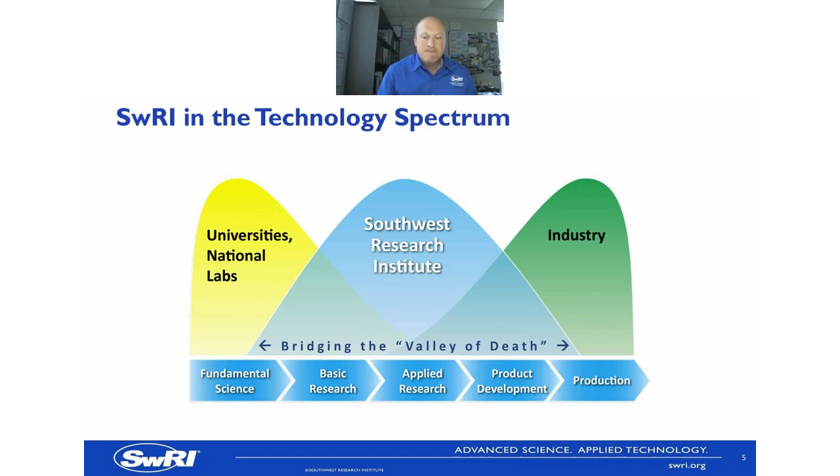The very first IR&D we undertook was over a decade ago, and it was the development of a new coating process based upon physical vapor deposition. PVD describes a variety of physical deposition methods that can be used to produce thin films on substrates, including glass, ceramics, metals, and polymers.

Material transitions from a condensed phase, whether liquid or solid, to a vapor phase, where it's transported to the surface of what you're trying to coat, where it then turns back into a solid condensed phase as a thin film. The most common process for conversion to the vapor phase is sputtering or evaporation.

Magnetron sputtering utilizes a magnetic field and an electric field to confine particles near the surface of the target. That increases the ion density and results in a high rate of sputtering. Magnetron sputtering is an exceptionally versatile method for thin film deposition. Other deposition methods are limited to the materials they can use as the sputtering target.

The source material can be almost anything with magnetron sputtering, since it doesn't need to melt or evaporate the material. The sputtering deposited film will have a composition that closely matches the source, and it will adhere to the substrate better than evaporated films.

Some of the major advantages of the process are a high deposition rate, thorough coverage of materials, high purity of the films, highly adhesive films, and uniformity on large areas. With regard to piston rings in particular, the low temperature is very beneficial.

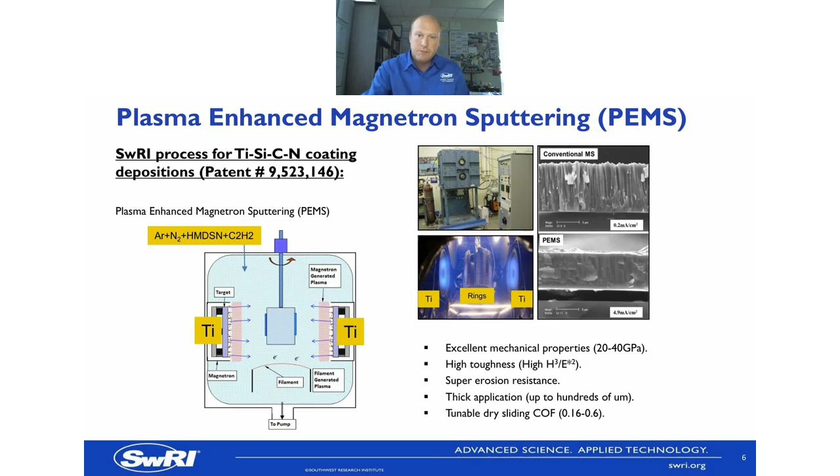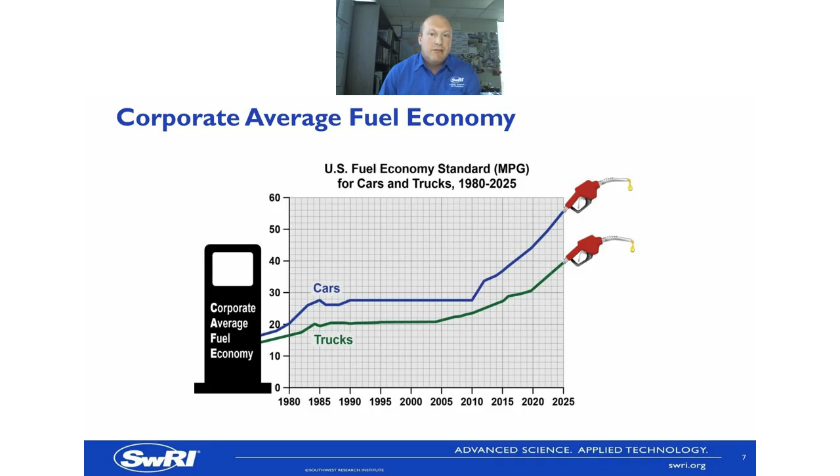The second IR&D was undertaken in 2013, in response to the increased need to reduce friction in vehicles to improve fuel economy in order to meet corporate average fuel economy targets. You can see on the graph they were becoming very strict at that time and were projected to become even more strict in the future. It reached a point where almost all the low-hanging fruit had been got from the car manufacturers, and we needed something that was going to really make a difference. So we targeted piston rings.

By targeting the piston rings - sorry, I apologize, we didn't do a thick coat of CrN. What we're looking at here are the limitations in 2013. Some of this has developed since then, but at the time there were limitations for traditional piston ring coatings. They used CrN coatings of up to about 50 microns in diesel engines. That's okay in diesel engines, but in gasoline it's not so good, it has a high dry coefficient of friction, which is obviously not great for fuel economy.

DLC coatings weren't really commercially accepted in about 2013, and there was insufficient coating thickness at that time. The titanium, silicon, carbon, nitrogen nanocomposite coatings that we developed had some advantages - they were super hard, thick coatings, erosion and wear protective - but they did still have a high coefficient of friction.

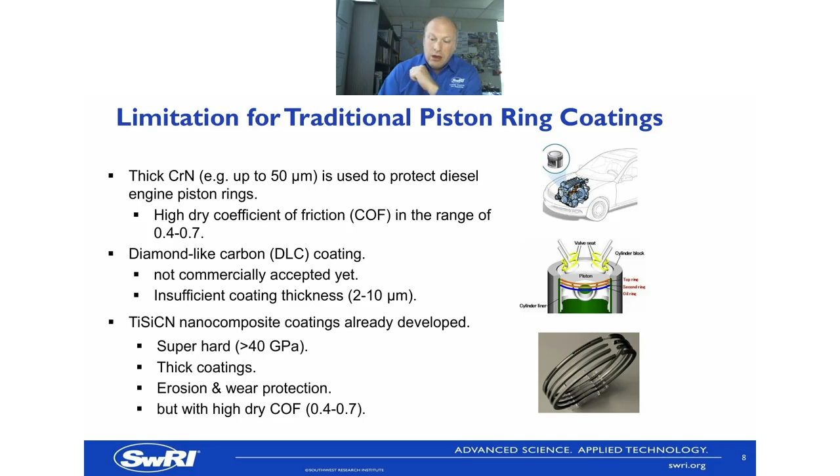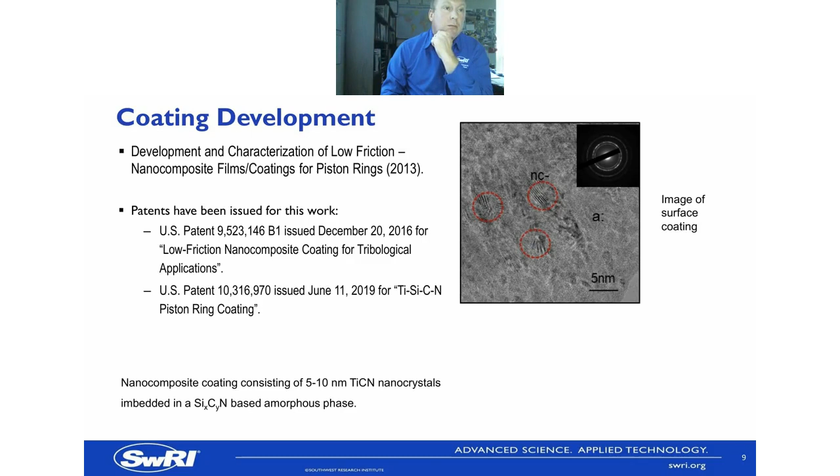So what we did is we developed the coatings further, and started to look at how we could improve that. It is a nanocomposite coating that consists of nanocrystals embedded in a silicon carbon nitride based amorphous phase. We patented that, and we also patented the particular ring coating that we were looking at doing.

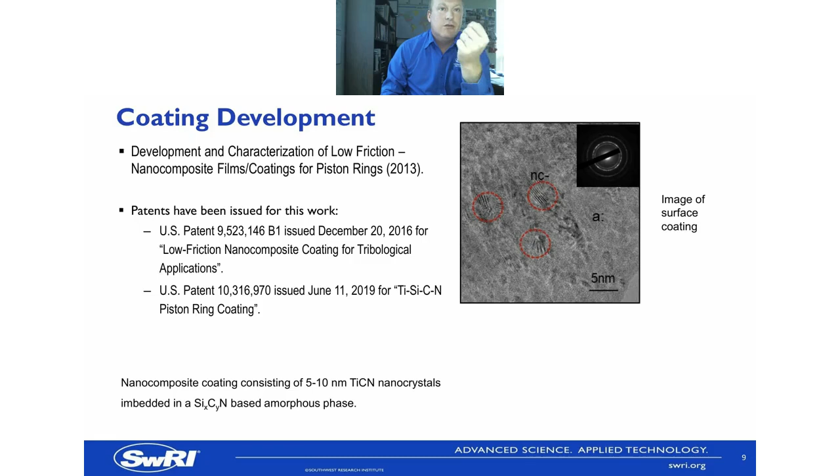The way to think about this - if you look at that image of the surface coating, think about that as cookies, basically. Chocolate chip cookies are a perfect example of how those coatings look.

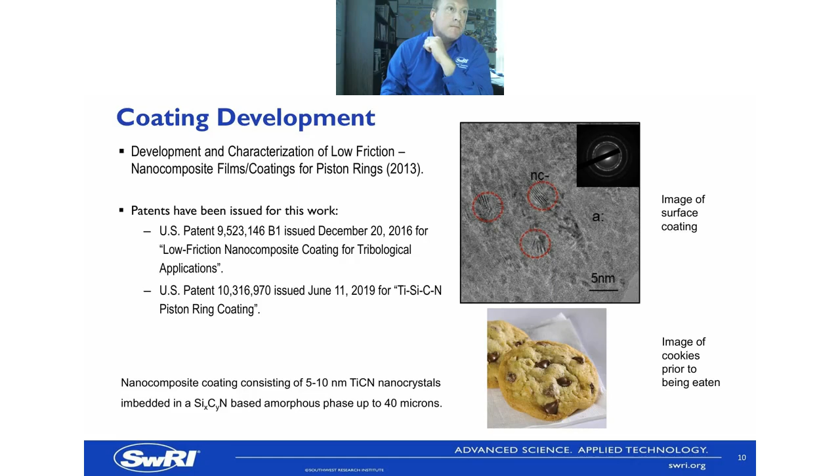We took this and tried probably about 12 different types of coatings. This method is kind of tunable depending on the amount of gases you put in and how you use it. And we tried, like I say, about 12 different coatings.

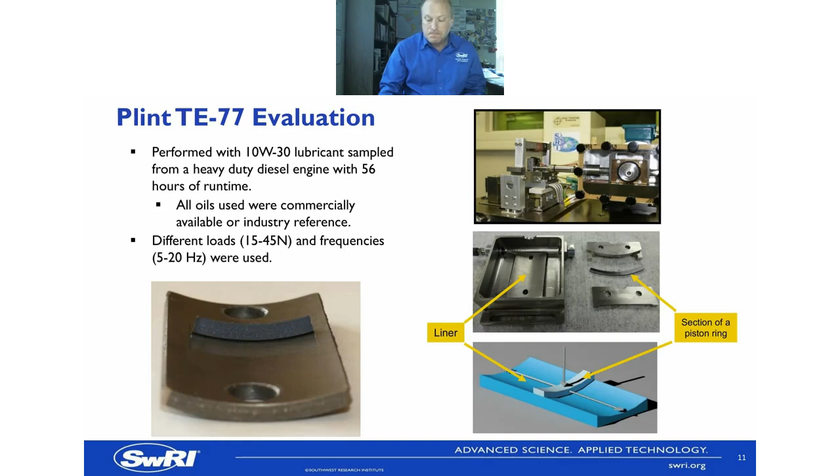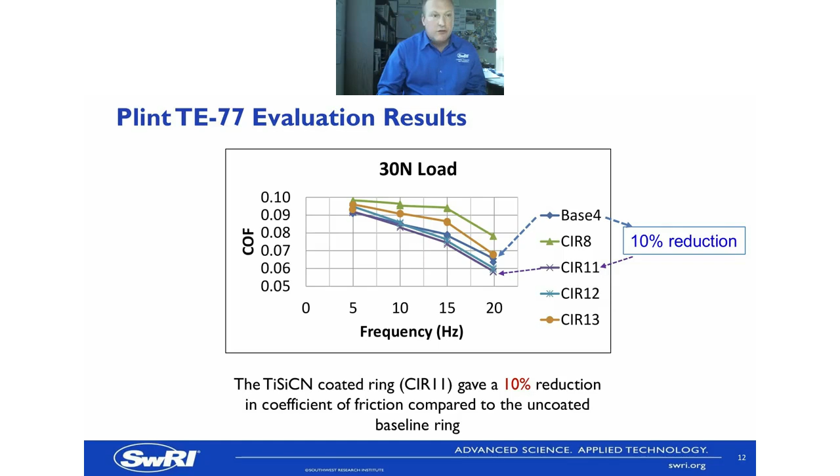We had our original coating, which we're calling base 4 on this graph. I haven't put all 12 on there because you can't differentiate between the lines if I do that, but I've put some example ones on. Some of them you can see increased in friction and some decreased. The CIR11 coating that we developed actually gave us a 10% reduction in friction at that 20 hertz position.

So that's the one we then took and worked further with. But to check that it was really giving us that answer, we coated some piston rings for our Ricardo Hydra engine, put them in there, and ran them in that engine. You can't really see the engine in that left diagram because it's surrounded by all the ancillaries.

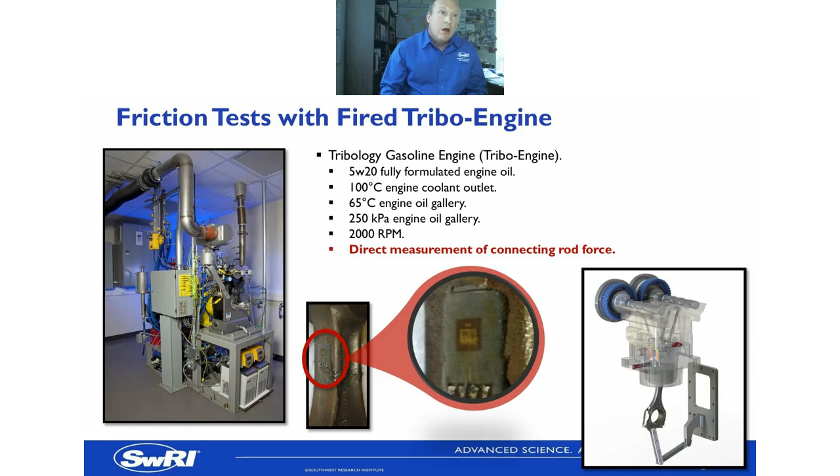But basically, if you look in the middle there, we have sensors on the side which allow us to measure the friction response. They're in the Wheatstone bridge configuration so it doesn't account for bending, it equals that out. We measured directly the friction on the connecting rod of the piston assembly, and from there, knowing the forces and pressures and everything else, we can calculate what the actual friction is. It gives us graphs that look like this.

On the left-hand side there, you can see the full rotation of the engine through intake, compression, power, and exhaust. It allows us to study in detail and see where throughout the engine process we are reducing the friction the most and having a good impact.

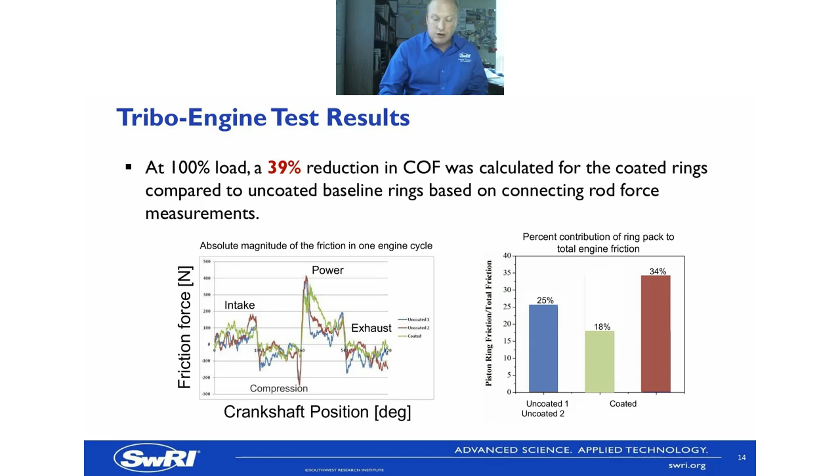On the right-hand side, you can see we built the engine and ran it with the standard rings. We then put in the coated rings we'd developed, then ran again with the standard rings, and on average we saw a 39% reduction in coefficient of friction. Obviously you're not going to see that in a full engine - it's a little bit biased in the single cylinder Hydra engine because you haven't got as much stuff as you have on the full size engine, but it still points in the right direction of the effect that we have.

Now that's okay if you get low friction, but we also need to know that this is going to last. So we also took this and did some durability tests with a 2.4 litre Caterpillar engine. This is a standard ASTM engine test. We modified it to accelerate wear of the piston rings and cylinder liner. Baseline and coated rings were running it. We do weight loss of the piston rings and dimensional change in the cylinder liner.

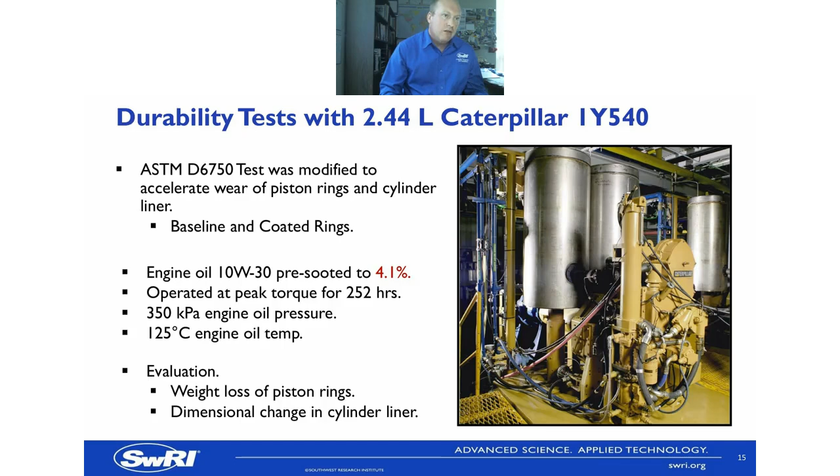I haven't gone into details here - it's not really the focus of this presentation, but we ran it with 4.1% soot. Obviously, running with pre-sooted lubricant is higher wear oil than you'd experience if it was brand new. We did 252 hours at 350 kilopascals, basically high pressure and relatively high engine temperature.

The summary of that, when it came to an end, basically showed a 10% reduction in coefficient of friction in the reciprocating rig, a 39% reduction on average in the gasoline engine. We had a reduction of 28% and 40% in weight loss for the coated top and second rings in the diesel engine, and a 50% reduction in liner wear, which obviously shows we've managed to successfully develop some sort of piston ring coating.

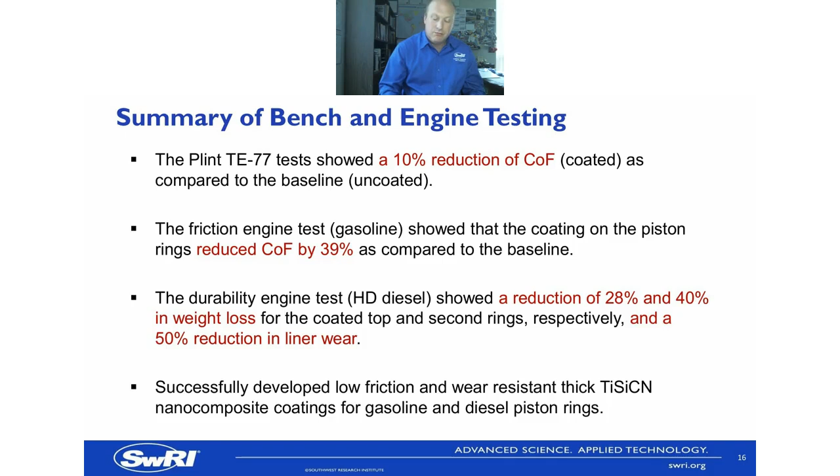But vehicle manufacturers are not going to buy a piston ring coating from you based upon that. They're going to license that piston ring coating based upon actual behavior in a vehicle, a full vehicle.

And so what we needed to do was develop a system where the vehicle could be as accurate as the bench rig. And that is why we need to do this.

In the past, it's been easy. If you have a fuel economy change from 20 miles per gallon to 27 miles per gallon, that's really easy to do. But if you have a fuel economy that's going from 20 to 20.5 or 21 miles per gallon, that's much more difficult to show and actually have a significant change that's outside of the noise of the measurement system.

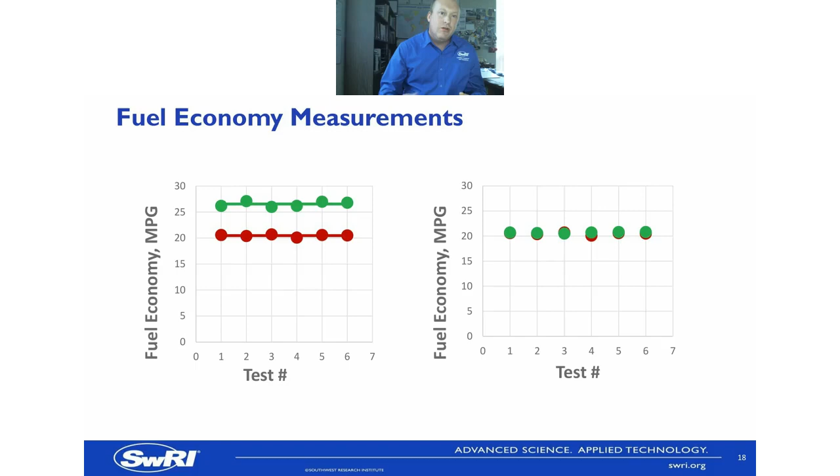So we needed to be there. And so what happened was we asked for another internal research project. That internal research project basically took the method that's used for doing fuel economy, which is a combination of a federal test procedure, representative of city driving, and the highway fuel economy test, which is representative of just being on the highway, and run both of those tests and combine them to give you a typical kind of fuel economy improvement.

But when we run those tests, not currently, but back then when we applied for this IR, what happens is you have a person sat in a car on a chassis dynamometer, and they're using the accelerator pedal to accelerate and decelerate and follow what they're supposed to be following. Accelerating and decelerating can be very, very small movements, and every time you do that, you're changing the fuel economy. And so that's where the error comes in, because a human being trying to repeat the same thing time and time again is not going to get it exactly the same, never mind how good they are.

So what we did is we developed a system in the IR where we were able to measure the input signals. The advantage of going from a cable powered accelerator to an electronic input allows you to measure that electronic input and then feed that back into the vehicle instead of the human being doing it. And that meant that we were able to repeat and get very, very fine accuracy.

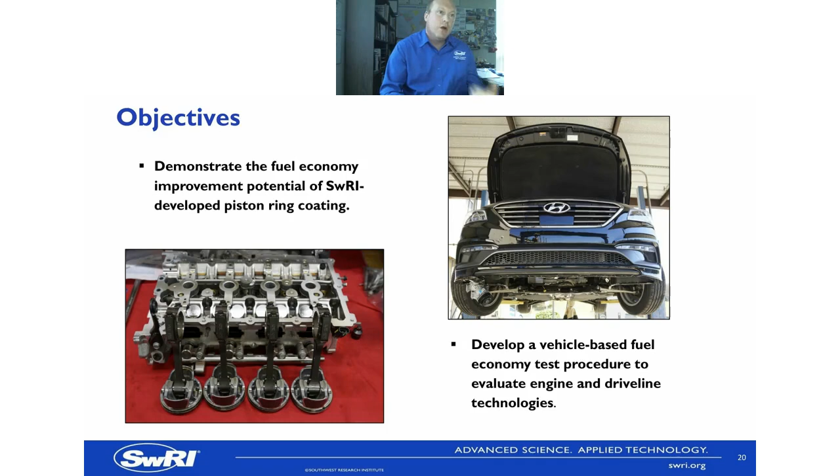Now, what we did is we happened to have that Hyundai lying around, not being used after it had been used for some other testing. So we took that vehicle, we bought a new engine and ran it in, and then we installed a modified ECU so we could conduct the testing we wanted, where we can input the signal and get the repeatability. We then installed Part A, which are the original OEM ring set, and we ran them.

Then we tore the engine down and rebuilt it and ran with Part A again, the original OEM parts. The purpose of that was to look at the effect of tear down and rebuild and make sure we weren't affecting things negatively by doing that. We then checked for a fuel economy shift due to that and found that there wasn't one. So we were able to rebuild without problem.

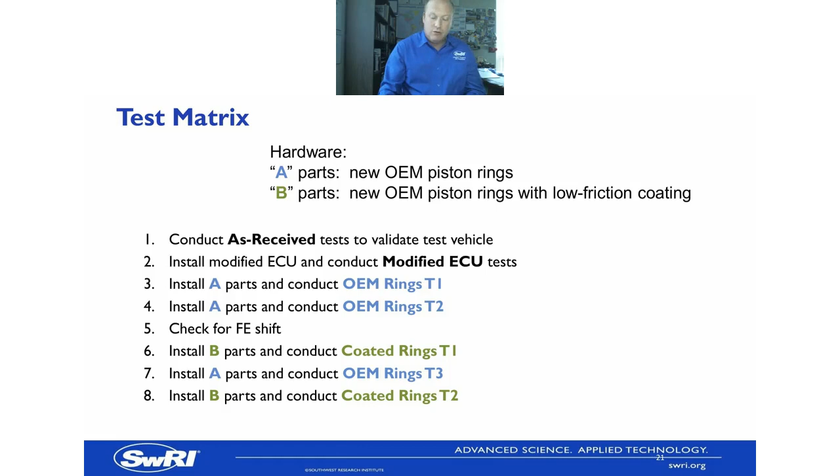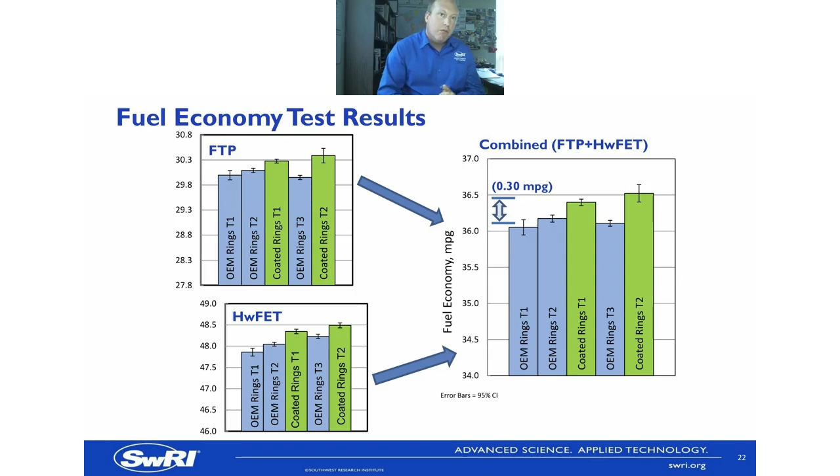So then we installed Part B, which were the OEM coated piston rings with our coating on them. And then back to the original OEM parts, and then back to our coated rings. And what that gave us was the results that we see here. So we take the fuel economy test results and the highway test results, and we combine those, and we were finding a 0.3 miles per gallon improvement if we look at the average over those results.

So in summary, we managed to show that we could actually, in an entire vehicle, save some fuel economy.

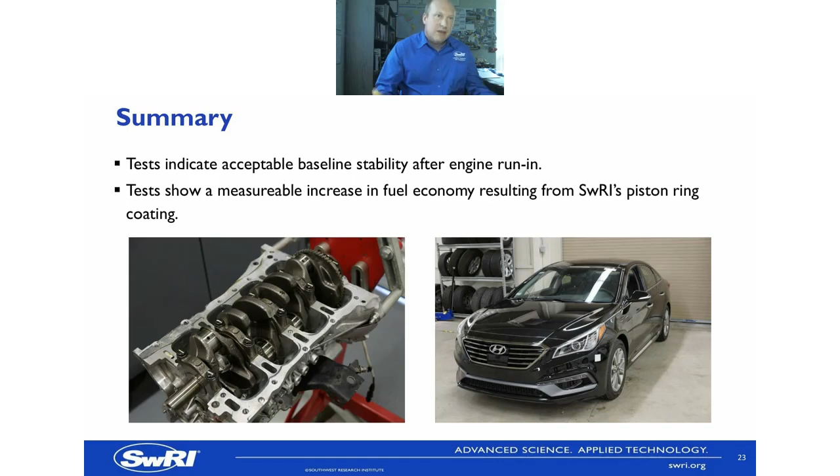So why variable hardness? Why have we now moved from that piston ring into a variable hardness coating for rings? Well, Total Seal and Southwest are working together to further understand the effect of the run-in of cylinder liners. So if you want to have a well-sealed liner, you need to make sure that you've got as little gap as possible between the ring and the liner. And to achieve that, you need the parts to run in very effectively and very smoothly.

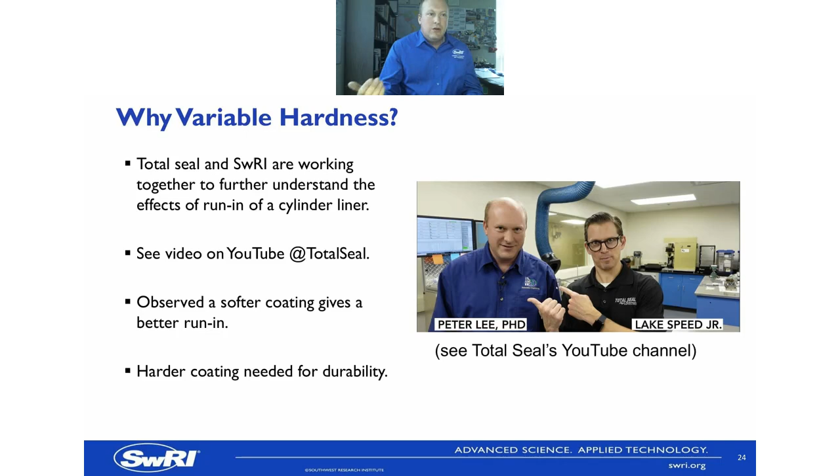You don't want any scoring on the ring. You don't want any scoring on the liner, which basically creates small gaps that gas can get through. You want your blow-by to be as low as possible so that you're managing to use all that power for fuel economy. So we're looking at how different coatings, different liner finishes are going to match together, and what's going to give us the best run-in and the best ultimate result. Now, what we did observe was that a softer coating gives a better run-in, but that isn't any good, because that coating is eventually just going to disappear because it's soft. And then what you need under that is a hard coating.

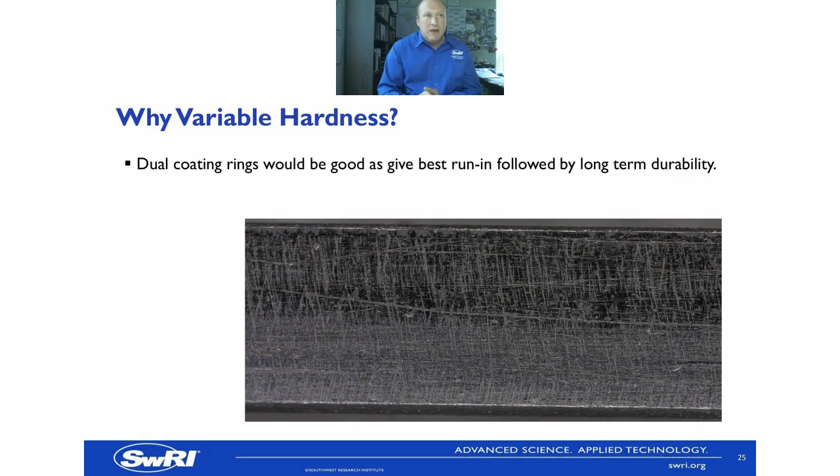So if you do that - and here's a picture of a piston ring - you're at this point saying you need a dual coating. Now, dual coatings unfortunately don't work that well. One of the things that Lake tried while he was working in the labs with us was a WC/C on a CrN, and it delaminated. You can see on the top edge there where it's beginning to delaminate, and a few spots on the main ring where it's touching. That delamination is not good.

That delamination is working against exactly what you're trying to achieve, because you then have small particles in the oil that are going to get between the ring and the liner and create those scores that are exactly what you're trying to not have and get rid of.

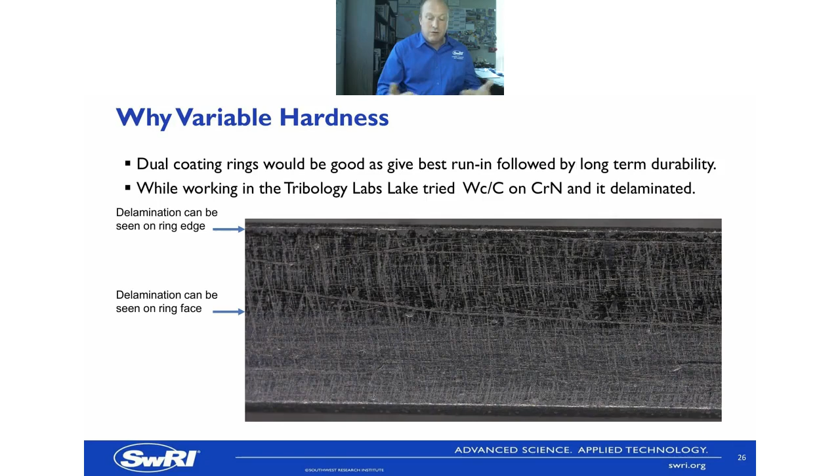So we came up with the theory: if using a softer coating for run-in gives a softer run-in, so less damage is done to the surface of the liner by the asperities as they're removed, then a single layer variable hardness coating might be possible. It would solve the shortcomings of the single layer, single hardness coatings, and it would remove the delamination issues of the dual layer coating.

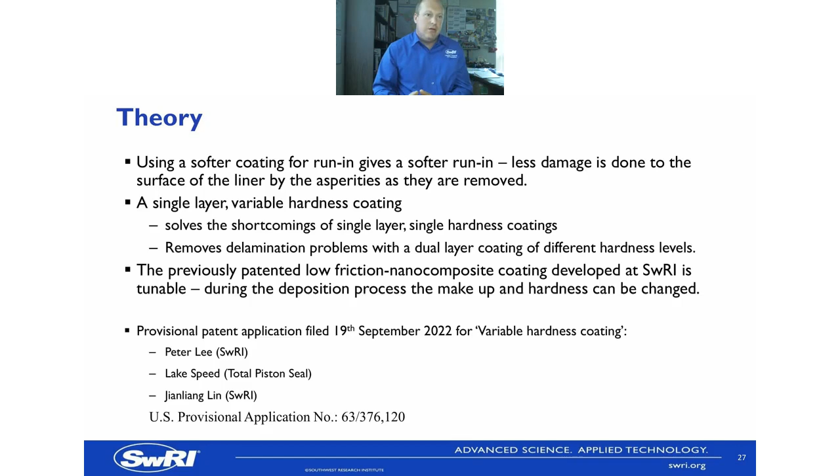Now, we'd already previously patented our low friction nanocomposite coatings, and we went down to the materials lab and coatings lab and spoke with the technicians and engineers down there and said, we already know that we can take this coating and make it different, because we did that 12 times in the previous IR. Well, what if you can change the deposition of the coating during the coating process? So basically dial it in from a hard coating over to a soft coating right at the end and see whether that has the effect we're looking for.

Well, the plan was to apply various run-in coatings on test rings and see if that works. So that's what we did. We did a series of, I think this time about 6 different coatings, and tested them in the reciprocating rig to try and find improved run-in characteristics. We selected the best one and applied that to a full set of rings. I then packaged those rings up and sent them to Lake Speed, and he put them in the NASCAR engine, first with baseline rings, which was CRN, and then with our variable hardness rings that we sent him, to find out if it was genuinely having the effect that we thought we were going to be seeing.

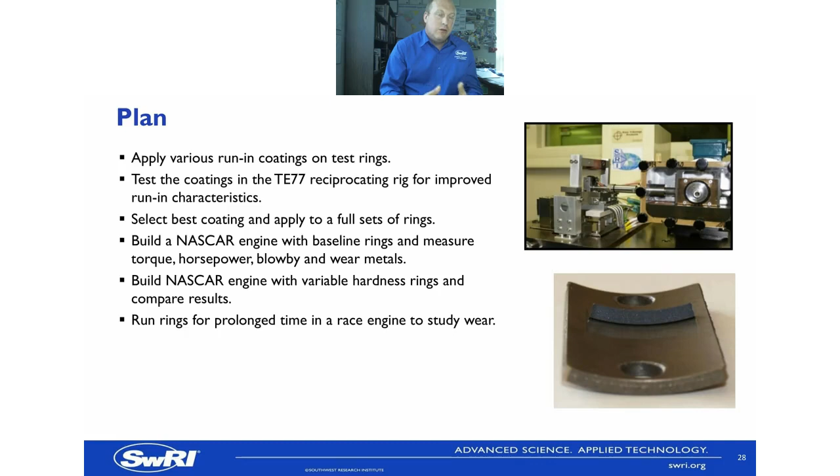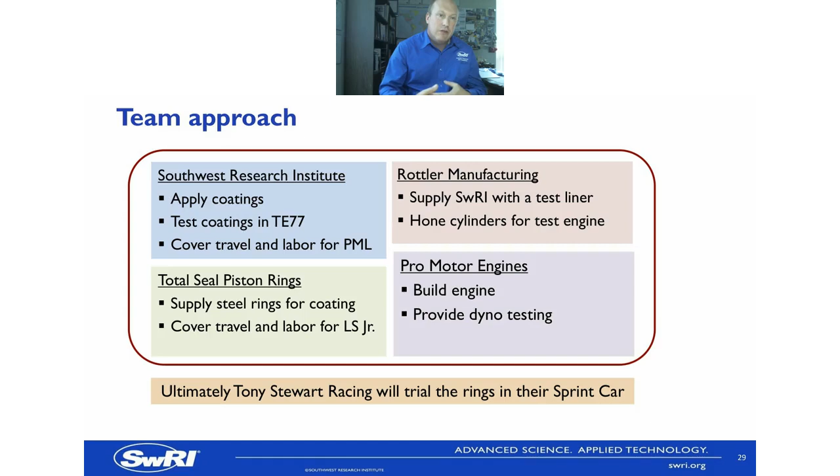Total Seal Piston Rings supplied the steel rings that we were coating and playing with, and then covered Lake Speed's travel to go and do the NASCAR engine test. Rottler Manufacturing supplied us with a test liner and honed the liners for the engine test. They were honed exactly the same, and they were the same liners, so we were able to cut those up and then run them in the TE77. And the ProMotor engines built the engine with Lake and provided the dyno testing capabilities to try this out. Ultimately, the plan was to go to Tony Stewart Racing and trial these rings in a car on a track and actually see if they're having the desired effect.

So let's start the beginning of this with the TE77 testing. As I said, it's the same liner for all the tests. We used the 5W30 oils, the same one for all the tests. We ran 2 tests with each ring just to make sure we weren't seeing any outliers. A baseline TISICN ring that we developed previously, we coated, and used that as our baseline. And then we tried 4 different variable coating rings - we did 6, but 2 were clearly not working, so we only had 4 that we could try. Same test sample profile developed for Lake's run-in investigations.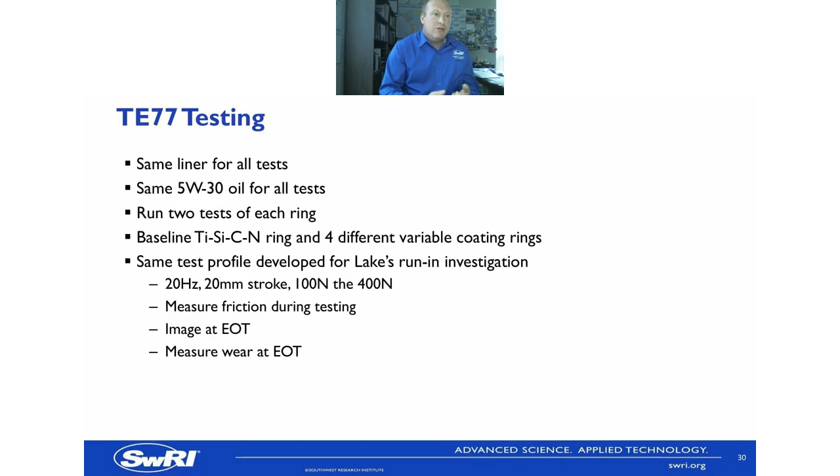So 20 Hertz, 20mm stroke. We start off at 100 newtons and then put that up to 400 newtons. We measure the friction throughout the test, and we have images at end of test and measurement of the wear at the end of test as well. So here are the results.

You can see that the purple is the baseline, and we have VH5, 6, 7, and 9, which are the 4 coatings that we tried. You can see that 2 of them are actually higher friction than the baseline, so that's an undesirable outcome in this situation. But they're also quite noisy. You can see we have 2 coatings that have run in nicely and are lower friction and actually much less friction noise as well, which is highly beneficial and what we're looking for.

So we're now just going to look at VH6 and 7 moving forward, because we've already discounted 5 and 9.

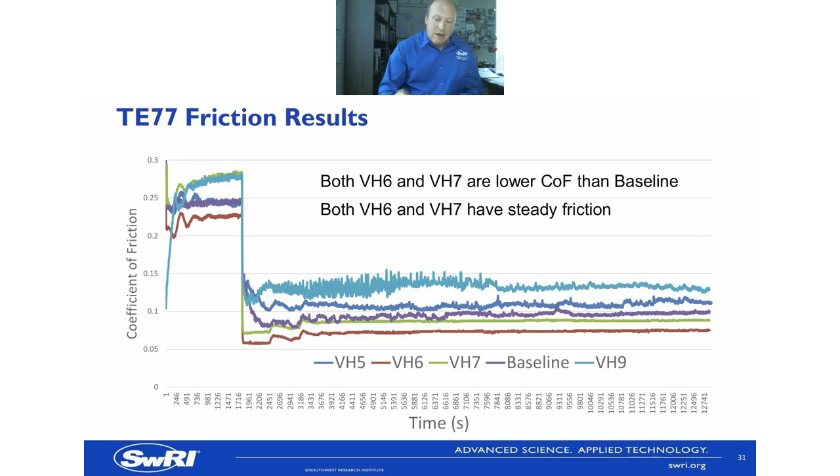What we're going to look at is the liner specimens. So note, if you look closely, you can see the crosshatch on the test surface there. These are just the fixing holes that we screw down to the base of the TE77 to hold it in place while we're doing the testing.

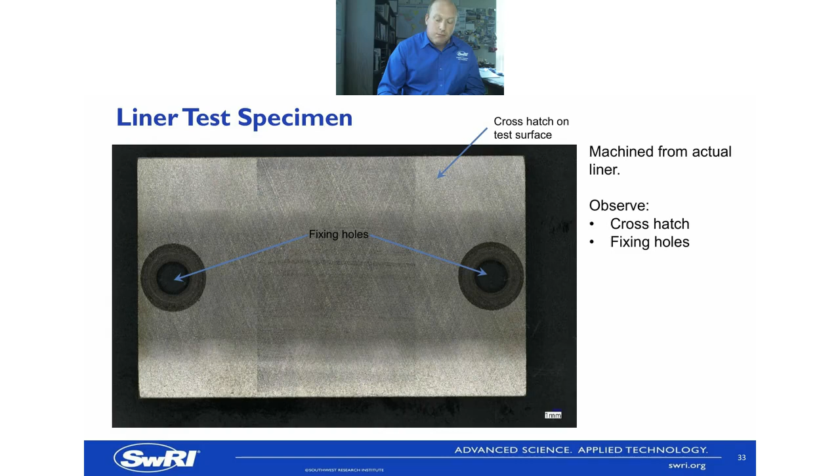This is the reciprocating ring contact. The ring is reciprocating backwards and forwards on that area, and this is the wear scar area that we're going to be looking at. So that's what you want to be focusing on the next few slides.

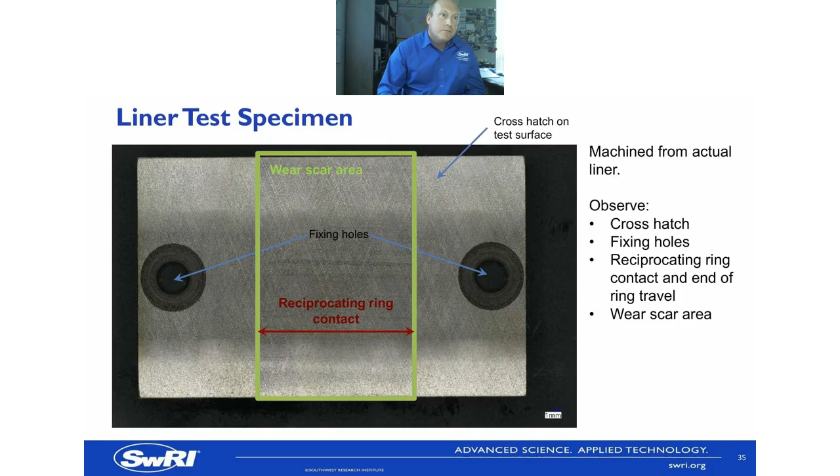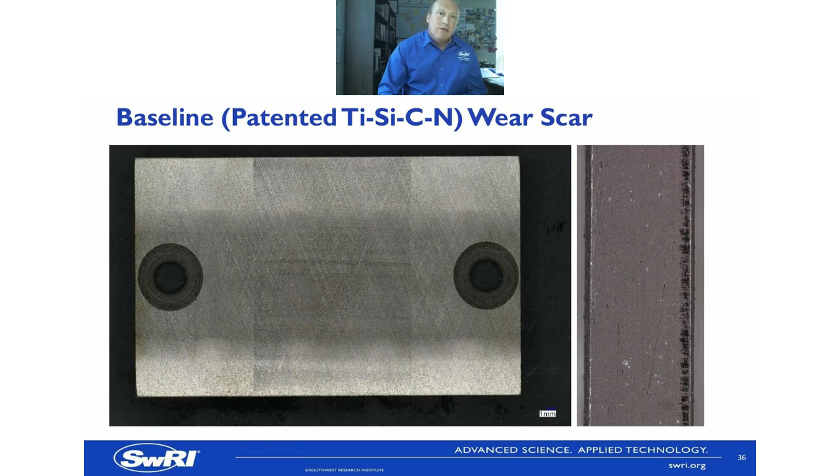So this is the baseline. You can see some of that scoring that I was talking about, where there's lines along the line of reciprocation. And you can see on the ring there's a little bit of wear, just on one edge, which is normal behavior.

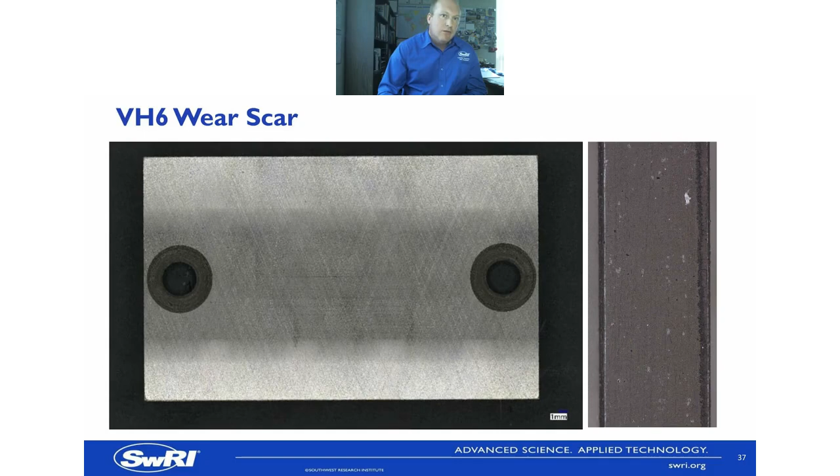VH6 wear scar, you look at that one, you need a bit more hard push to see exactly where that wear scar area is. The ring's looking very similar to the last one, so no poor effects.

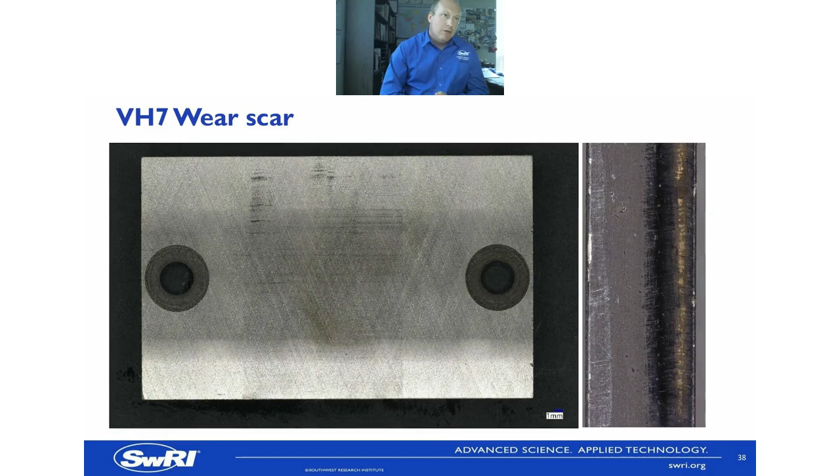If we look at VH7, you can see that's not coping quite so well. There's a lot more wear from it on the ring, and you can also see those lines and wear on the liner that we're not really wanting to see. So VH6 is a clear winner.

All 3 there just for comparison, so you can look at those together. There's more ring wear for VH7, similar ring wear for VH6 and the baseline. You can see the distinct ends of stroke on some of them, but not on the others. The white light data I've not presented, that can be a bit confusing, but it confirms the same as the visual we're seeing here. So VH6 is a clear winner - it's the lowest friction and the lowest wear.

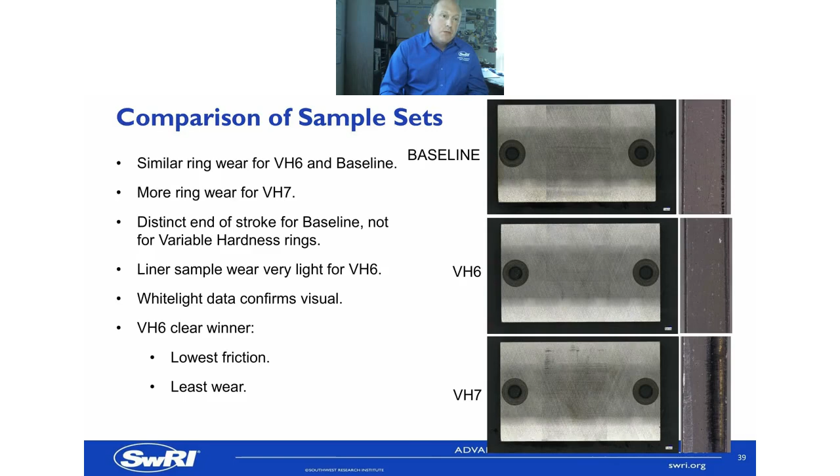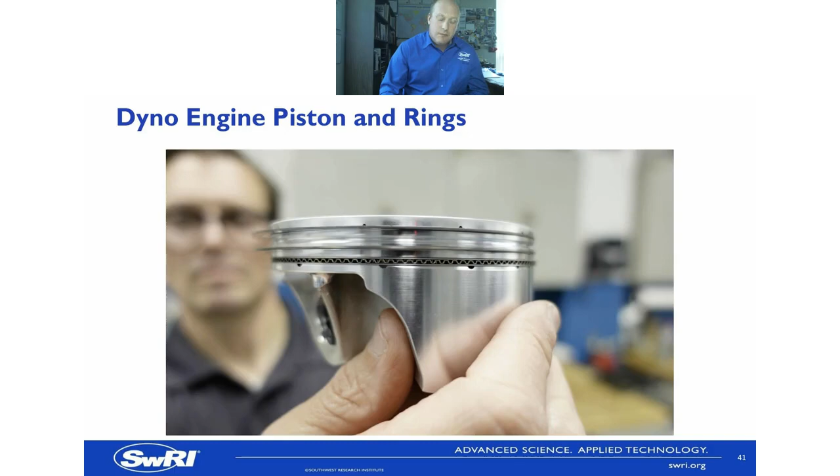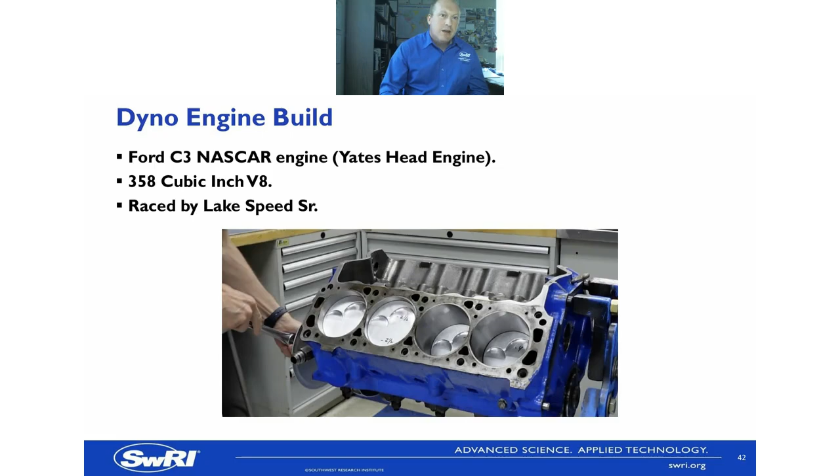This was put into a Ford C3 NASCAR engine with a Yates head engine. This is a 358 cubic inch V8 engine. It was actually the one that was raced by Lake Speed, so that was a nice little touch, that we're using that to try and develop stuff. And this is the engine on the dyno where it did the runs.

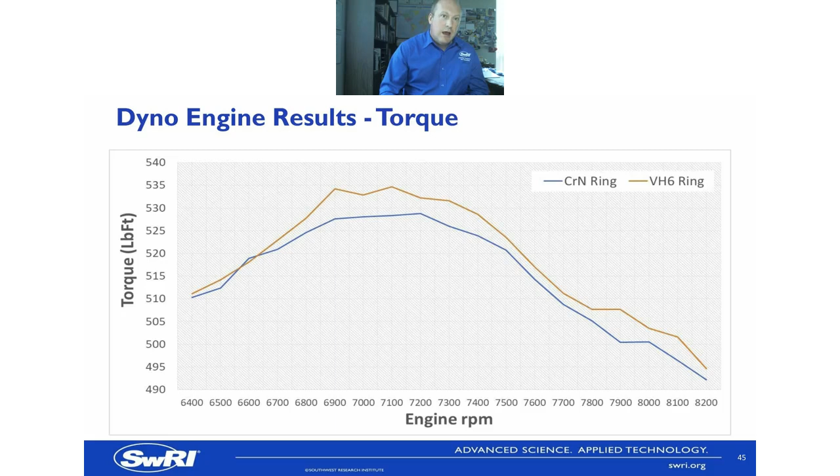So this is the torque that we get from the chrome ring, the original ring that's in the engine. We do the dyno runs and measure the torque, and then this is what we got with the VH6 ring. You can see quite a distinct improvement there - we have a 1.3% increase in peak torque between the chrome ring and the VH6 ring. There's a slight change in speed, but not much, from 7,200 down to 7,100, but that's good.

Oil temperature and water temperature are also registered there, because obviously that's important - we'd want to know that this is due to the ring and not due to a change in viscosity of the lubricant because of a change in temperature.

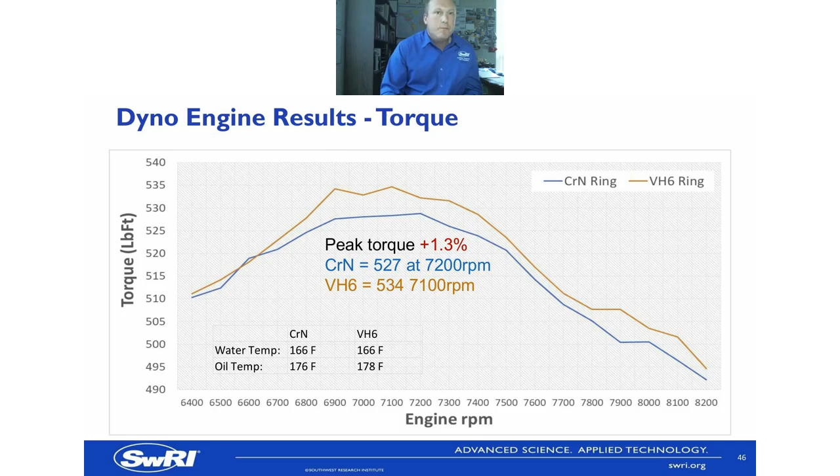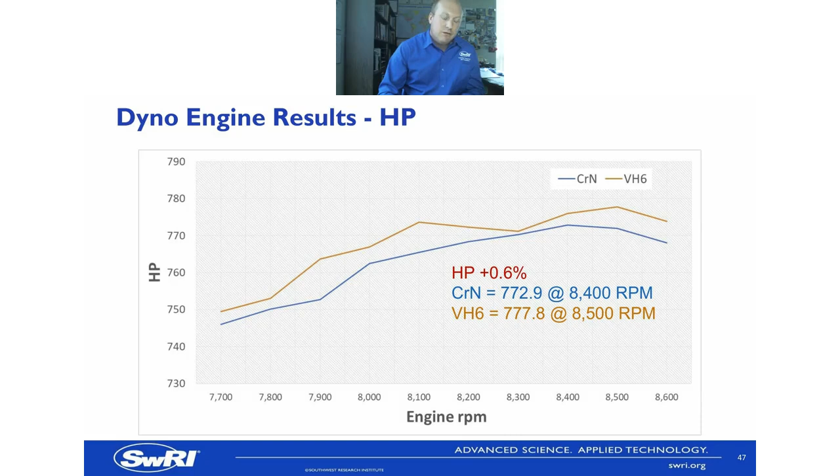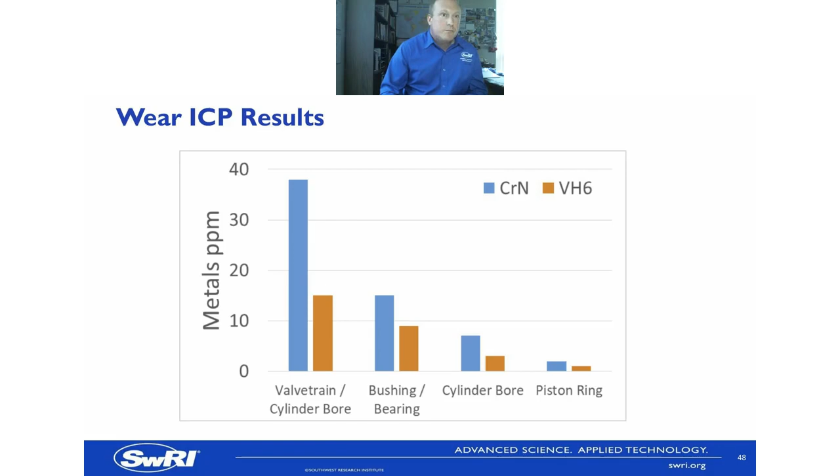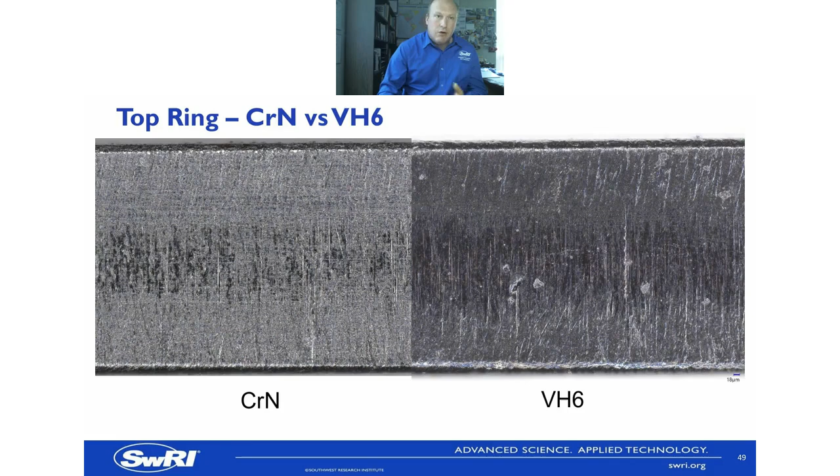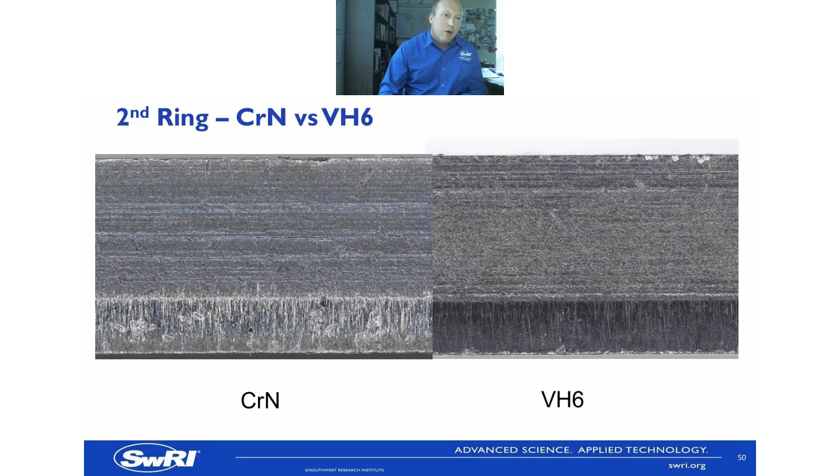Interesting was the blow-by and run-in. Blow-by is an indication of how well those rings are sealing, like I explained at the beginning. You want to reduce blow-by. The CrN coating was down at 2 CFM after 30 minutes of running, whereas the V6 coating effectively ran in almost immediately and was down at 2 CFM basically as soon as the engine started and they were taking the measurements. From a run-in perspective, the V6 coating remains the same at 2 CFM through all 10 power runs, and this indicated that the run-in was almost instantaneous because that blow-by did not change throughout the testing.

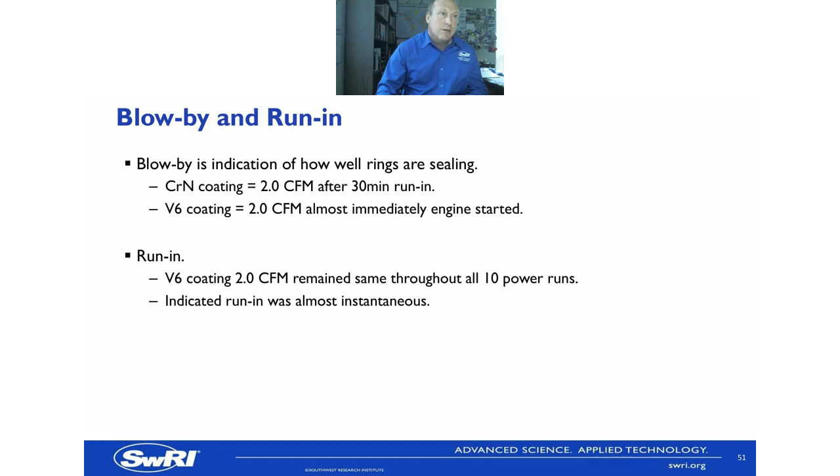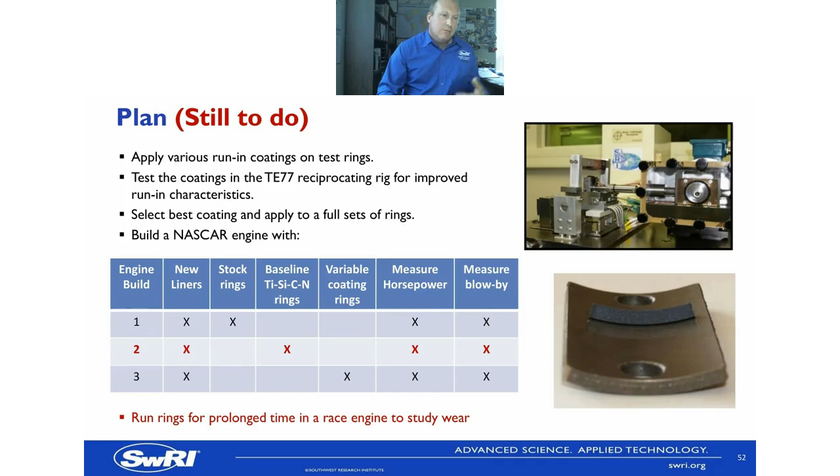What we still need to do to prove this out a little more is run a prolonged time in a race engine, just to make sure that we've got the durability there that we're wanting to have, and that we don't see any tick up in wear due to anything happening. We also would like to run the baseline rings in the NASCAR engine as well, just to get a baseline of the Ti-Si-C-N ring that this technology came out of, which would really show how the variable coating is actually changing the run-in and has an advantage effect.

So to summarize, the variable hardness coating actually exceeded expectations, demonstrated significant efficiency gain compared to the baseline chrome coating. We saw increased torque, which is equivalent to acceleration of about 1.3%, increased horsepower, which is fuel economy of about 0.63%. On top of that, the ICP results suggested reduced wear, which is highly advantageous, and run-in was almost instantaneous, which doesn't matter so much for everyday vehicles, but for race vehicles, competition vehicles, is very, very beneficial.

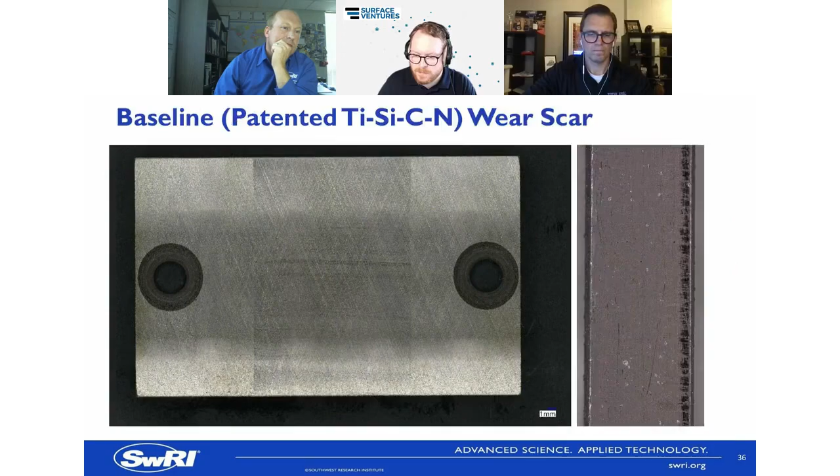Okay, that's really, that's 5 nanometers that you're looking at there. No, it didn't affect the engine performance at all. These things are embedded in there, but it's so small on the 5 nanometer scale that particles don't affect or create a problem. Was there a roughness measurement made before and after coating? Yes, there was, I didn't put that in. It was slightly smoother afterwards, but not by much.

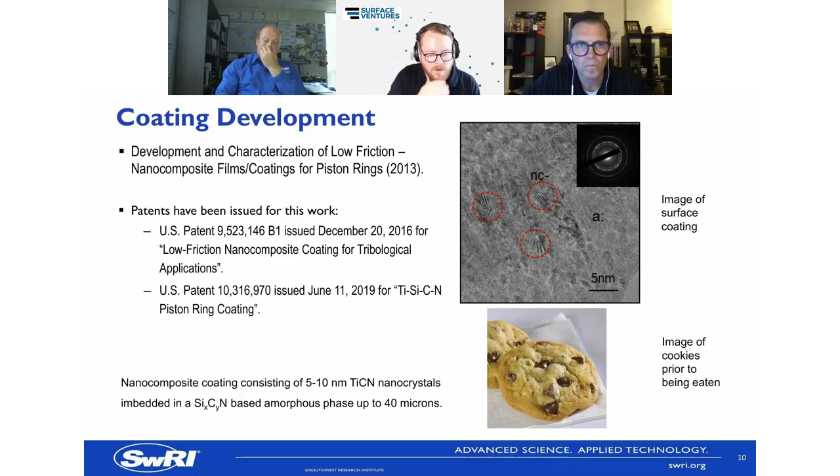Next question from William: are these liner samples oriented as we might see them? As in, up is deck side, down is crank side, looking at the hone crosshatch angle. I think that was on the TE77 sections on the slide.

When you're working on the TE77, you have to be a little bit more aware of how it's operating. You can't change the load, so you have a fixed load, and it's reciprocating backwards and forwards. The way this is oriented is that the top and bottom of the liner are to the left and right hand side of the picture, and so the curvature is from top to bottom. The rings therefore match the curvature of that liner sample, reciprocating from left to right, as if it was going up and down.

But you really have two kind of top dead centers where it stops, because you can only load it to one load. You can't replicate the load at the top dead center at one point and the bottom dead center at the other point. So if you're doing a 20 millimeter stroke, as we were here, you've got the first 10 millimeters from top dead center down, and then it's doing the same again as it comes to a stop, as if it's a top dead center. So it's a little bit different to real engine testing, but it replicates the more severe condition of top dead center.

One of his questions was looking at the crosshatch angle. Those are honed at a 45-degree crosshatch angle. We honed all of these on a Rottler CNC hone, the H85AX is the hone we use. Ed Keebler from Rottler is the guy that actually honed all these liner sections. We built a little fixture so we could hone the sleeves and do all that, and we checked it with an optical crosshatch angle checking tool. All the cylinders we ran had the same crosshatch angle, all 45 degrees.